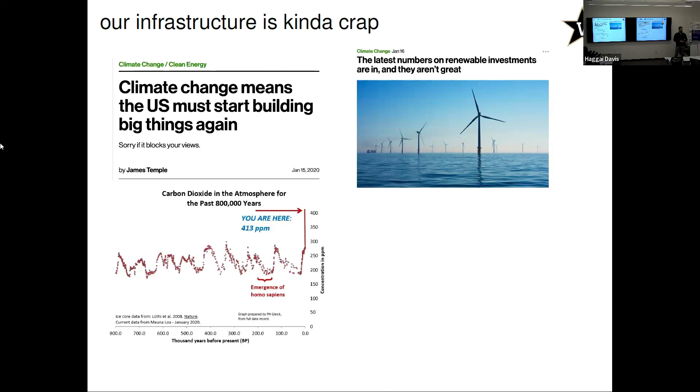These are all examples of what's going on over the past few years in our infrastructure. We know we haven't done enough to curb carbon emissions, so we need to start building bigger and more resilient things again. We also know that investments in renewables, although they've been increasing, haven't increased to the extent that we can actually meet the carbon offsets and carbon reduction that we anticipate and require. We also know that carbon dioxide in the atmosphere has reached substantial peaks, so a lot of crazy figures and worrying trends.

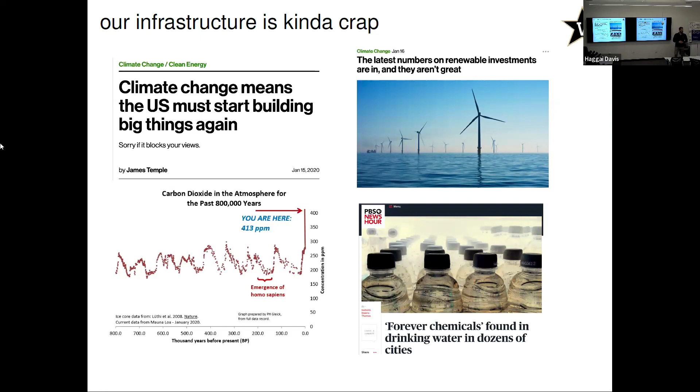There are also problems in water systems with forever chemicals and PFAS contamination, another issue that extends beyond the carbon footprint of other infrastructure. And we also know that Americans spend so much time on the road, so everywhere you go you're faced with substantial challenges, which gives academics like myself and other folks a lot of work to do.

In general, there are four major ways to address all of these issues in today's infrastructure, and these solutions can be categorized into four different approaches. The first one is policy-driven: governments, system operators, and stakeholders decide to enforce a new policy to curb emissions through taxation or tolls and so on. That's the first plan of attack to address these issues.

The second one is investment—building more stuff: building more solar and wind farms, building more batteries, building better reservoirs, and so on, adding more lanes sometimes, which can be controversial for the transportation folks. So this is the second solution.

The third solution is through incentives, using game theory, economics, mechanism design, and incentive design to change people's behavior. The fourth one is through theory—designing better control algorithms to manage today's infrastructure. So assuming we don't want to do any of the first three, how can we come up with new theory to improve today's infrastructure? My group's focus is mainly on number four. This doesn't mean the first three are not important—these strategies are all complementary and required to advance our infrastructure in cities, but my group focuses mostly on number four.

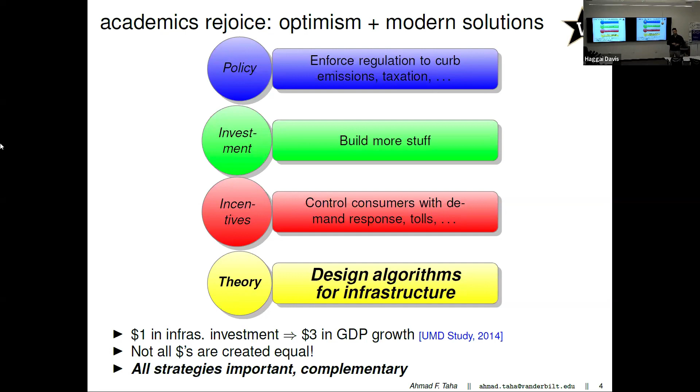So I'll reiterate, my group's research focuses on creating computational algorithms for urban infrastructure, and this is what the talk will be about. My group tries to develop the balancing of the development of new foundations with applications.

So I'm interested in two things. I'm interested in new theory and understanding why things work and how they work, but also I'm interested in applying it to realistic models and infrastructure in energy, power, water, and transportation.

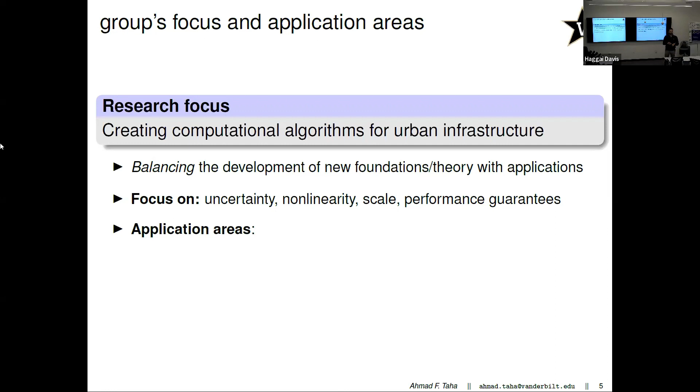The themes that we'll be focusing on today are uncertainty, either human-driven uncertainty or system-driven uncertainty, nonlinearity and the physics and the governing laws of physics in water, energy, and transportation, scale, and performance guarantees. I'm interested in an algorithm that works under certain non-restrictive assumptions or conditions, and I'm interested in understanding why it works more than whether it works or not.

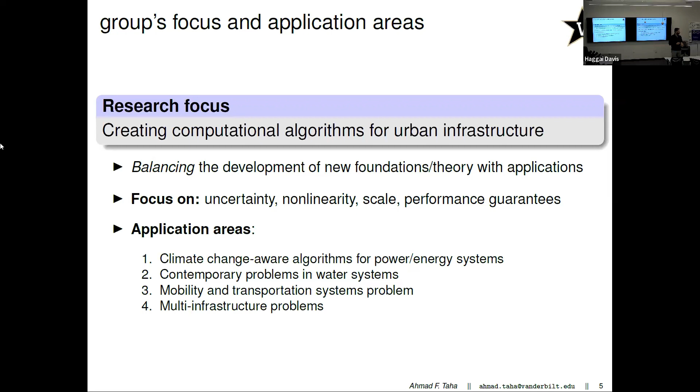And we will be covering these four themes. We will be talking about climate change-aware algorithms for energy systems. We will talk about contemporary problems in drinking water systems. We will also talk about mobility and transportation, as well as multi-infrastructure problems. So I won't have time to talk about number 4 as much, but there will be a little bit of the first 3 bullet points, basically.

The major technical challenges that I will be addressing in this talk, and that most of my PhD students work on, are basically one of these 4 challenges or all of them combined. First one is the lack of mathematical frameworks.

Sometimes in many infrastructure models, there's a lack of system-theoretic understanding of what's happening as a whole in the system itself. There's also significant time scale discrepancy, meaning that there's multiple time scales involved in the decision-making problem in a specific infrastructure.

Most of the dynamical models, most of the physics-based models that govern the laws of physics in transportation, power, energy, and water, are non-convex and nonlinear. So optimizing the performance can be very tricky and challenging. And the 4th theme is the rampant uncertainty. There's uncertainty from human-centered conditions, from weather conditions, from parametric uncertainty, and so on and so forth.

So these will be the 4 things that we will discuss today. And before we go through the discussion of what I'll basically be talking about, there's a core area of science involved, which is control theory.

So even if you haven't heard of dynamic system theory or control theory, or you come from a very different background, hopefully this slide should give you a super brief crash course on control theory in maybe a minute or two, all right? And during the talk, if you have any questions, just please feel free to raise your hand and ask me. It's meant to be an informal talk, so please don't hesitate to ask questions.

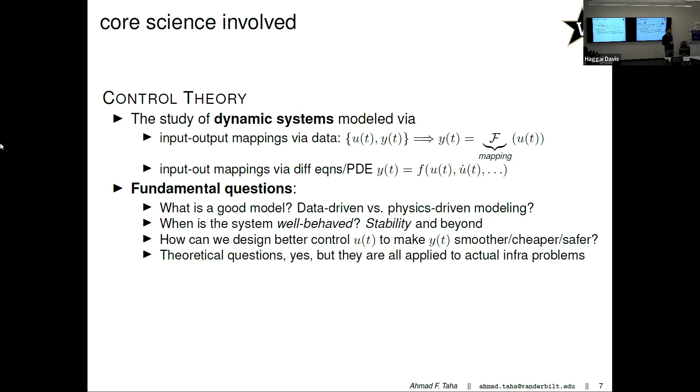Many of these questions are theoretical indeed, but they are all applied to critical infrastructure problems that we will discuss, with examples in climate change, flood control, traffic reduction, and so on. So basically, the entire talk will be about finding these models and how we use them to find a better U of t to make Y of t, my data, my sensor output, my measurements, behave in a better way, whether it's in transportation, water, or power systems. So more of a tutorial than a list of contributions.

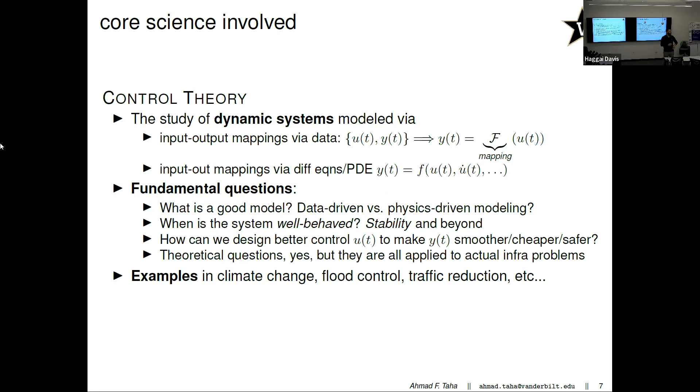The talk will come to you in 4 parts. The first part is some control algorithms in transportation systems. The second part, which will be the longest, will be on drinking water systems, basically how do I control hydraulics and water quality in drinking water systems. The third part will be about stormwater systems and how we regulate floods or control floods in real time when they happen in urban environments. And the fourth part is a new set of theory, a new set of math for renewables-heavy power systems, where most of the power coming from energy systems is generated from resources such as solar and wind.

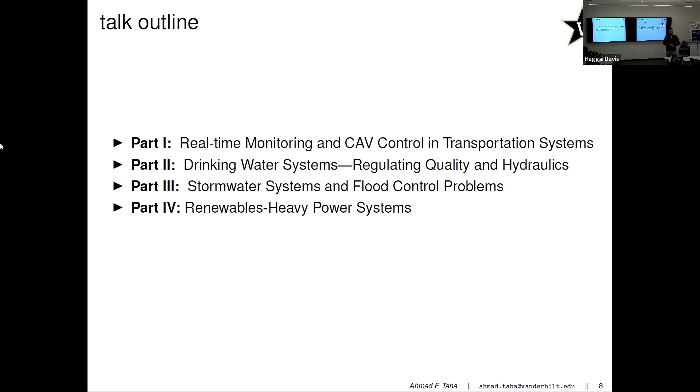So as promised, the first part will be related to transportation. We know that America loves cars. Anywhere you go in the world, you see fewer cars than here. And I'm sure most of us are aware of the history and the politics of why Americans love cars, right?

Motivation here is basically that technology can indeed reduce crashes, congestion, and emissions. And maybe we are not in need of Musk et al. to rescue us with their full self-driving technology. Maybe there's already technology that's really good enough for us to use to transition towards electrified transportation and fatality-minimal transportation systems.

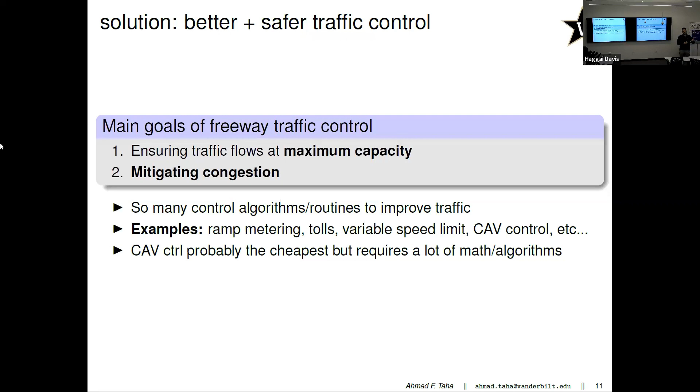Arguably, CAV control is probably the cheapest technology, but the downside is that it requires a lot of math and engineering, and it also requires the willingness of the system operator to take a risk of actually implementing an algorithm that an academic wrote in a transactions paper. But arguably it's cheaper because if you have a couple connected autonomous vehicles on the road, they can give you a lot of benefit to reduce congestion. This is what this portion of the talk will be about.

Before we talk about CAV control, let's talk about VSL control, which is variable speed limit. Basically, putting signs on the highway that tell people to abide by a certain speed limit, which is lower than the usual speed limit.

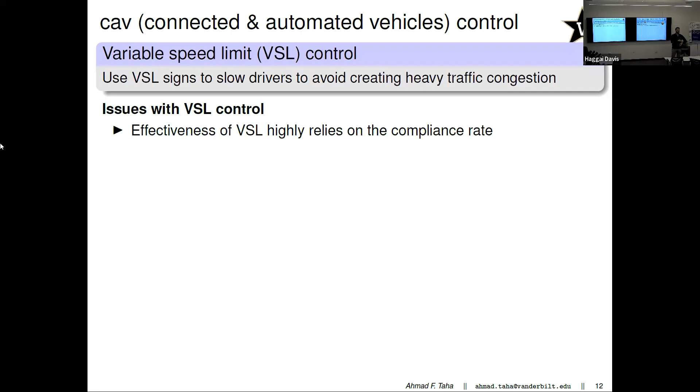There's issues with VSL control, which are basically that it relies on compliance rates. The nice math and theory you derive from VSL control mostly works when everyone's complying, or when most people are complying with the posted speed limit, but no one actually complies, or more than 80% of people do not comply. But there's actually a lot of recent work on coming up with theoretical guarantees when half of the population doesn't actually abide by the posted speed limit. So it's a very active and interesting research field.

Something I want to notice about VSL, because we have implemented VSL in Tennessee on a couple of highways: even when we post a variable speed limit sign that people do not abide by, in the period of time when that variable speed limit controller was posted, there has been a significant reduction in accidents on that same highway stretch over a significant period of time.

From a control engineering perspective, we want people to comply, but from a society-based perspective, this control algorithm, even though the way the number was generated is so complex, resulted in great societal improvement. People are not complying, but the outcome was still that there's been so much reduction in fatalities. Maybe it's because those who drive recklessly slowed down a little bit. There's a lot of societal components we do not understand in why VSL actually works.

But this talk is not about VSL, this talk is about CAV control. The scope of this work is to design real-time controllers for CAVs considering capacity drop, which is this phenomenon that happens when there's congestion on the highway. We want to take one of the most advanced traffic nonlinear models and do CAV control in a very efficient way.

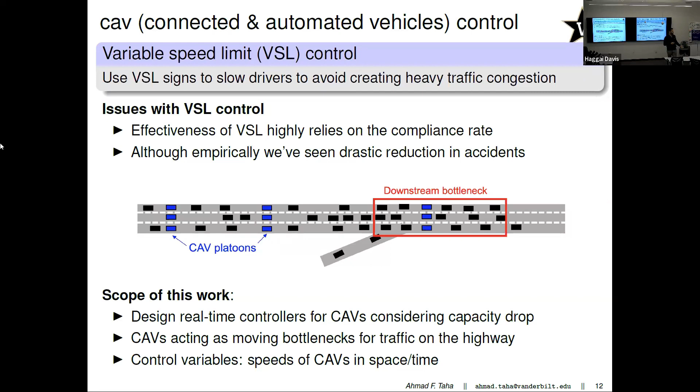There's a lot of literature on this topic that I'm not going to go through because I really want to get towards other topics in this presentation and give something for everyone. But basically, there's been a lot of control algorithms to solve this problem in the literature, and some of them are based on PI, which is a proportional integral control algorithm that seeks to minimize the error, defined in terms of a linear and an integration component of the tracking error of the system.

MPC is a model predictive control algorithm that optimizes using a coarse system model representation. There's been a lot of work on this, but the issue is that much of it is not computationally efficient, requires a lot of tuning, or requires real-time optimization. This adaptive linear quadratic regulator, another control algorithm we've specifically tailored, derived, and designed theoretically, addresses these issues in the literature.

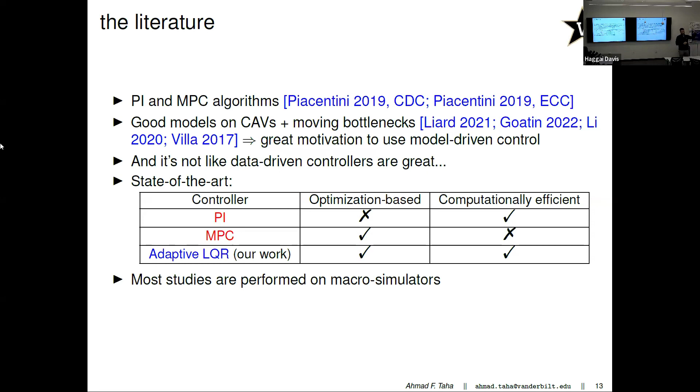Also, most studies have been performed on macro simulations, which are not very detailed models of what's happening on the highway. Ideally, we want to implement these control algorithms on very detailed micro simulations and get data from the highway. So the objectives are to design an efficient controller with performance guarantees.

We're not just interested in designing a controller that works. We're interested in designing a controller for the CAVs that works under certain conditions, and we want to know why it works, when it works, and when it fails to work. We call this performance guarantees. The other objective is to test the controller on both micro and macro simulation.

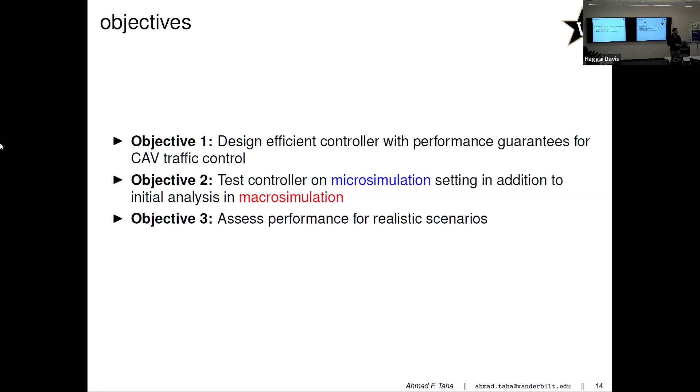This is basically the problem statement: the CAV traffic control problem. Even if you've never worked in transportation, this should give you a brief introduction to the connected and autonomous vehicle control problem. It's basically adjusting the speed of a car that someone's driving to mitigate traffic downstream, subject to advanced models of traffic and data and measurements from the system operator. That's the CAV control problem: adjusting the speed of the connected autonomous vehicle that's been put on the highway by the city or transportation system operator.

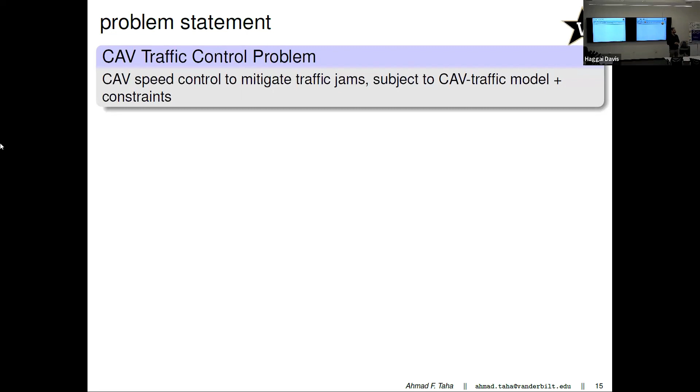Mathematically, this problem can be written as follows. We want to minimize a certain cost function in terms of the state of the system and the control input, the state being x, the control input being u, subject to the nonlinear dynamics. These nonlinear dynamics delineate two things: the physics of the car, basically the position and velocity of the CAV you're trying to control, and also a detailed model of the traffic densities on the highway.

Another control input is u of k in calligraphic u, meaning my control input for the car is bounded. I can't set an arbitrary speed; the speed increments of my CAV need to be slowly adjusted, and so on. The system states here are basically the densities on the highways and the CAV states. The cost function minimizes some operator-driven cost to penalize congestion and to make sure that changes in the speed of the CAV are smooth and not erratic.

So this is basically the control problem: a cost function subject to physics and subject to other human-driven or car-driven constraints for the CAV.

The approach we follow to solve this problem is through an adaptive linear quadratic regulation, where you don't need optimization. We solve problem P by actually not solving P directly, which is the novelty here. You could take this to any optimization solver, but the problem would be non-convex and super slow to solve. You want to solve this in real time, but you can't because the problem has so many states and tricky nonlinearities for traffic models, so you need to find proxies to solve problem P.

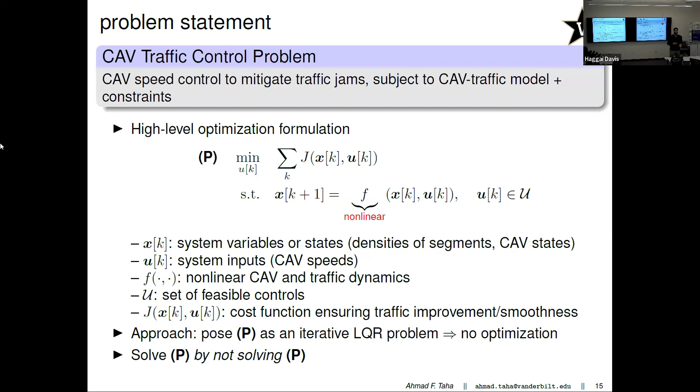In more detail, this is what the dynamics of the traffic densities and CAVs look like. The state vector collects all the traffic densities rho on different highway segments, as well as the positions P1 through P of the CAV positions at time K. The control inputs are the speeds of the CAV platoons—each platoon should ideally have a speed, and this is what we're solving for, to produce for the person sitting in the car.

The objective is to design a simple feedback control K that looks like this. In dynamic system theory, this is one of the simpler control laws, and it tells you basically two things: one, measure x of k in real time—measure the state of the highway in real time.

And the state of the highway is nothing but the state of the traffic densities on the highway, which if you have a lot of sensors, you can reconstruct or compute, in addition to the state of the CAV. But you're sitting in the CAV, so your state is kind of with you.

The second thing that this control law tells you is to compute a gain k as a function of little k to make sure that this problem I've explained earlier is actually solved. And this is what we do here. We find a way, given the nonlinearities of the system and the highly nonlinear system dynamics, to find k that changes iteratively in a very computationally efficient way with some performance guarantees and some metrics that we optimize for.

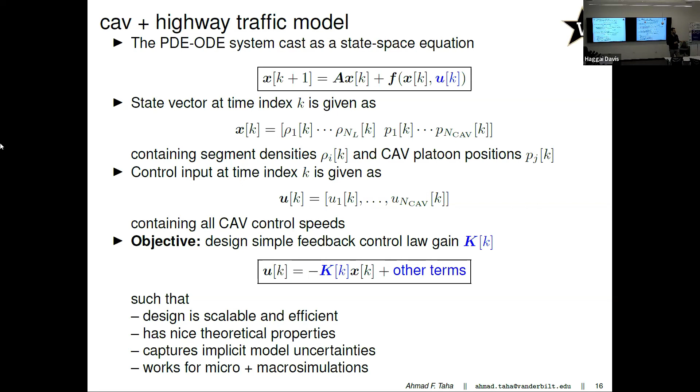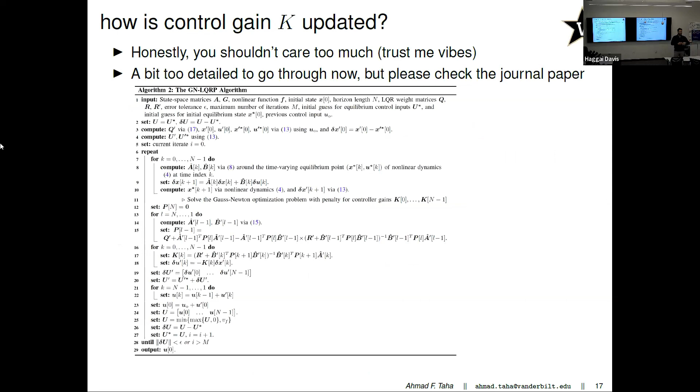I'm not going to go through the detail of the algorithm, it's going to take like 20 minutes and there's no point. So if you're interested in the algorithm, you can find it in the paper. But basically, the algorithm is just a detailed linear quadratic regulation, which is a very famous control approach, changed and modified to meet some performance guarantees for the nonlinear systems.

We have done two sets of simulations, macro simulations and micro simulations, and we have compared with the approaches in the literature, and we have utilized metrics in the literature that tell us how good the controller is behaving. I'll spend a few minutes just explaining what's going on here.

So for the macro simulations, the very coarse macro simulation that isn't concerned with individual vehicle dynamics, just depicting the traffic densities on the highway, we set up an 8-kilometer long highway stretch, with a duration of 2 hours and 10-second time steps, which could be reduced if needed.

An accident is simulated resulting in a jam, and what you see from the figure is exactly the jam happening sort of halfway through the end of the highway stretch.

So this is basically the heat map, or the traffic density map, that you see in many transportation systems papers, which tells you what's going on in terms of the segment number and in time, and what the traffic density is on the highway. Obviously, the more yellow the traffic density, the worse it is, which means there's congestion.

And this figure depicts what's happening without any control. Like on a remote highway somewhere where there's no control algorithm, this is usually what happens, and it takes so much time to actually get rid of this traffic jam.

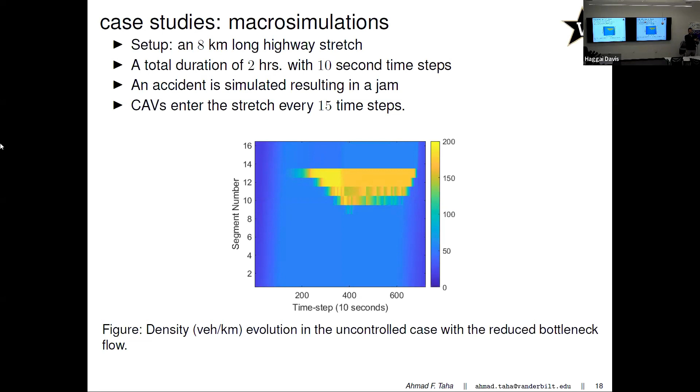Ideally, what do we want? Ideally, we want this yellow color to be dissipated throughout the figure, or to even be minimized through a smart algorithm. And this is what we want to ideally see.

So these are the answers that we try to answer, there's a typo there. We try to come up with answers to the following questions. Are the proposed controllers—and I have to say that we proposed a couple of controllers, not just one of them—effective against traffic bottlenecks?

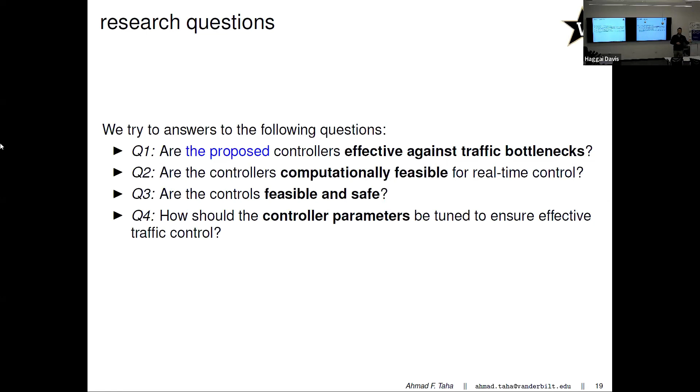Are the controllers computationally feasible, or does it take 5 hours to solve this one gain k while the simulation is running? Are the controllers feasible and safe, like can an actual driver utilize these components even if there's no adaptive cruise control or any technology in the car? How should the controller parameters be tuned? Do they require a lot of tuning, or are they tuning free? Can I implement a similar gain on a different highway setup, and will it still work?

We've also utilized some evaluation metrics, and the evaluation metrics are as follows: total travel time—after we implement the controller, is the total travel time reduced, or the same, or increased? Is the total travel distance becoming better? Is the mean speed lower or better, and so on and so forth.

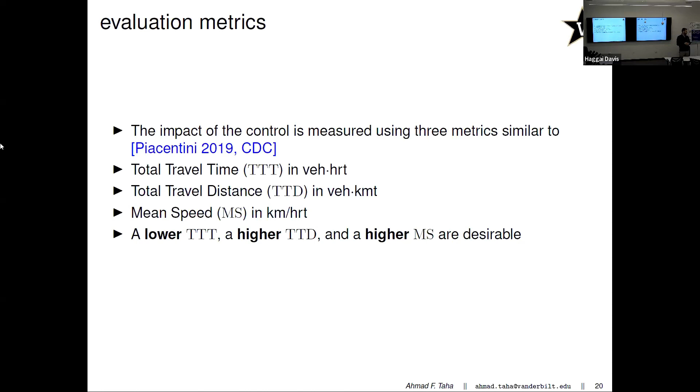Ideally, we want smaller travel time, right? You want to get home earlier. And we want a higher TTD, total travel distance, meaning the control algorithm is able to take people further away if needed, and a higher mean speed. So these are the three metrics that we have optimized for or tested for.

And this is what happens when we implement the controllers that we've proposed. We see that there's significant dissipation of the congestion and bottleneck here.

Yes, just a small question. Why do you have these three metrics instead of, say, just throughput?

We can. We wanted to be consistent with the papers that we were comparing with, so we used the same metrics that they did.

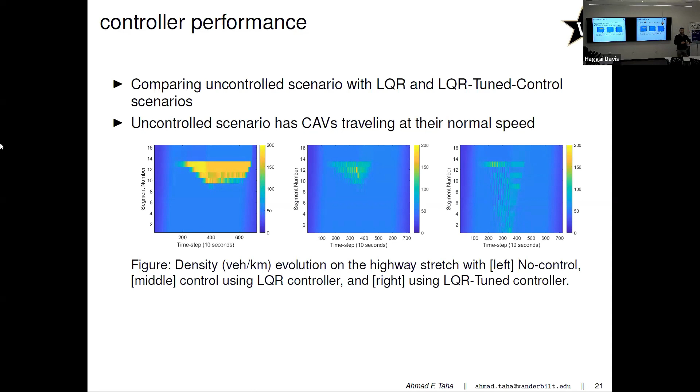So this is what it shows. It shows that the jam basically got significantly dissipated in space over a shorter period of time, which resulted in an improvement in the mean speed and a reduction in the total travel time, and an increase in the total travel distance.

Furthermore, we have actually also implemented this on micro simulations, and we've seen over a variety of simulations and test data that we were able to improve mean speed by 22%, a significant increase.

We've also compared it with the literature, with two approaches in the literature, and we've noticed that the proposed approach we're developing is truly plug and play, in the sense that you need very few computations. You basically just need some simple matrix vector multiplication to compute the gain k, which means you can actually implement it in real time, even if there are some delays in communication with the system operator.

The controllers also require very little tuning. There aren't that many parameters that you need to tune, whereas in proportional integral based control, you have so many little parameters that you have to tweak and play with to obtain your solution.

The journal paper explains everything in great detail.

Yeah, I'm sorry to interrupt again. Is this a centralized controller, or is it operating per... Centralized, yes.

Centralized. Another open research question is to actually figure out a way to make that gain k, that I showed you in blue, block diagonal, meaning it's decentralized, meaning it requires little communication, which could also be very important if you want to minimize the communication delay and so on.

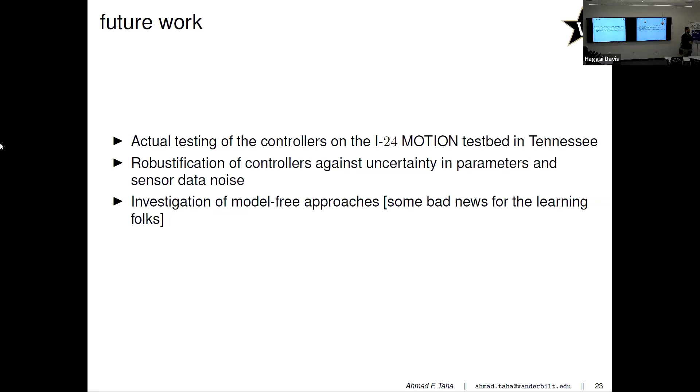Also, I'd like to spend a couple of minutes talking about the gigantic testbed that we have in Tennessee. Full disclaimer, I'm not part of it in the sense that I'm not one of the PIs, but it's something that I utilize all the time, and I'm happy that we have that at Vanderbilt and in Nashville. It's led by Dr. Dan Work, who you might be aware of.

But basically, we have a giant testbed on I-24 right outside of Nashville, Tennessee, that is the world's most sensed highway. It truly is the world's most sensed highway, in the sense that the state of Tennessee invested so much in making that stretch of highway highly sensed and highly automated and so on and so forth.

And the transportation group at Vanderbilt has done tremendous work in actually taking this raw data that you get from the highway and giving you traffic densities and speeds and so on, so you can use it in your research. This testbed basically provides real-time traffic MRI and allows for real-time control.

And the folks who were working on variable speed limit control implemented the VSL control based on this data and have seen a significant reduction in the accidents happening on the highway. So an impressive success story for the group there.

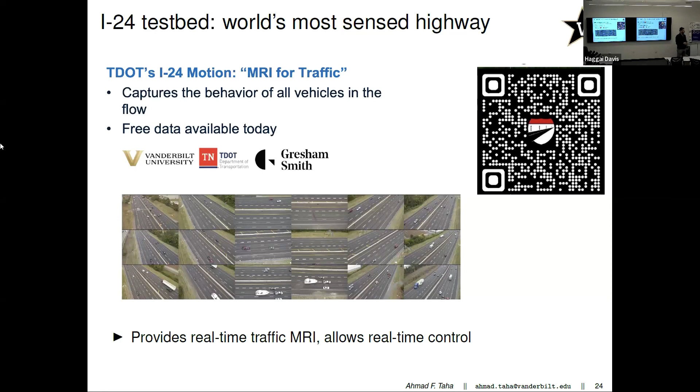And you see what these cameras look like. They look like the following: there's 40 poles, and every pole has 6 cameras which take a picture of the cars, and there's a suite of learning algorithms and image recognition and software identification and recognition tools that basically, from the pictures of the cars, generate densities for you to use in your research or to get real-time data.

So this is the website. Please visit the website to learn more about this and to download the data sets. I could spend so much more time on this, but please do visit the site and learn more about the work.

It's tremendous work, and hopefully soon anyone who actually wants to implement an algorithm can take these Simulink files and MATLAB files and start testing their own algorithm on what it could actually do to the traffic densities on the highway.

So you'll be able to plug and play any control algorithm you have in mind and see its impact, so that a reviewer of your paper wouldn't say, oh, you've just implemented it on a simple macro simulation model in your publication.

We've also worked on other research problems in transportation. The first problem I've worked on a few years ago with some students is: where should you place these camera poles on highways? Usually in transportation systems, they're placed arbitrarily every 1 or 2 kilometers, but that sounds a little arbitrary. So if you have a highway with on-ramps and off-ramps, and a certain physics-based model, how can you optimize the placement of traffic sensors?

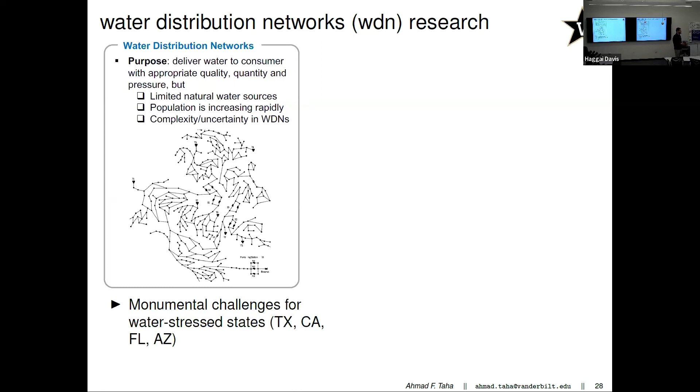So it's often one of the biggest issues in growing cities, like most of the major cities in Texas. Again, monumental challenges for water-stressed states such as Texas, California, Florida, and Arizona. So this is basically what WDN research is about.

To be more concrete, there are two significant areas in drinking water distribution systems that you see hundreds of publications on every single year, and they are quantity and quality.

Quantity is basically the process that defines pressure and flow, whether it's steady state or transient flow. We want to get adequate pressure and flow to consumers across the city. The major control engineering problem there is how to adjust the pump and valves in real time, or every hour, to maintain adequate levels of flow and pressure throughout the entire network.

The quality problem, which operates at a faster time scale than the steady-state hydraulic problem, is basically ensuring water is safe for consumption through water quality proxies. Typically chlorine concentration is a good proxy of whether you should be drinking the water, heavily filtering it, throwing it away, or boiling it. The control problem for quality is adjusting how much decontaminants, like chlorine, you want to inject in the network to decontaminate it from microbial or other sources of contamination.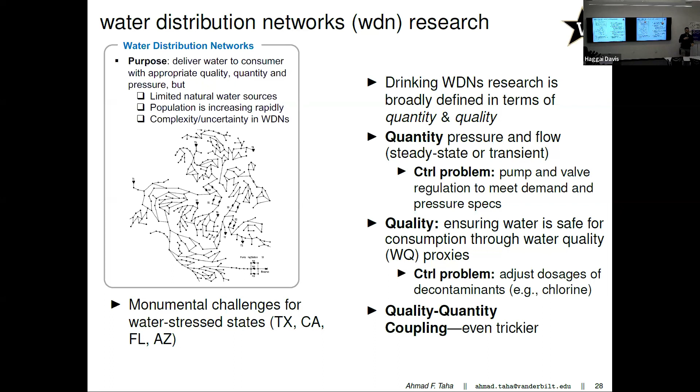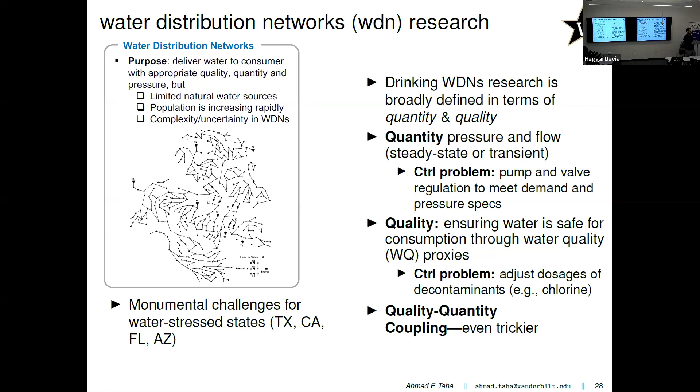Furthermore, there's also the interaction between quantity and quality, because quality is impacted by the pump speeds and how you adjust and regulate pumps and valves due to how water flows. There's a nice integration of the two, which makes the problem even trickier.

Some of the technical challenges specific to water systems: flow direction in systems could change arbitrarily, and the models are non-differentiable, nonlinear, and non-convex. The topology could be tree topology or looped, so establishing theory that works under different assumptions is difficult. And there's so much uncertainty in terms of the pipe roughness coefficient, the demand, sensor noise, and so on.

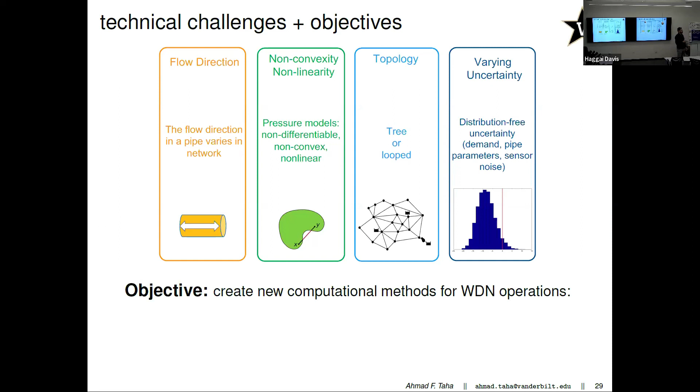So what I try to do with my group is create computational methods for water distribution network operations that focus on quantity, quality, and their integration across time scales. Ideally, I want these methods to be scalable, robust to uncertainty, and derivative-free, without making the assumptions people have made in the recent past about differentiability or linearization of these models.

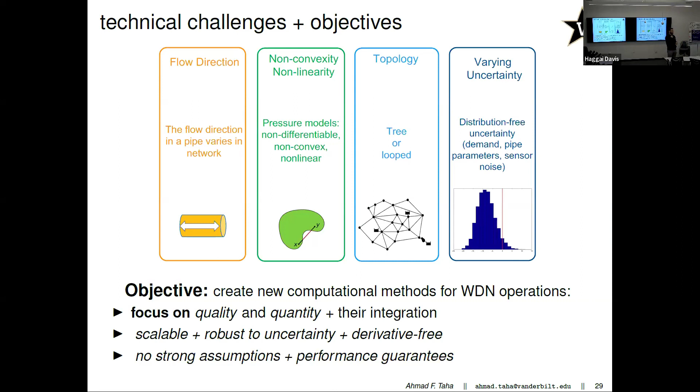This is what some of us may have learned in a hydraulic class or water resources engineering class. These equations model mass and energy balance in drinking water systems, in junctions, tanks, pipes, pumps, and valves. Basically everything you see here in blue is linear. Mass balance in hydraulic systems is linear because of the basic inflow minus outflow equals demand equation, and because tank dynamics are naturally linear.

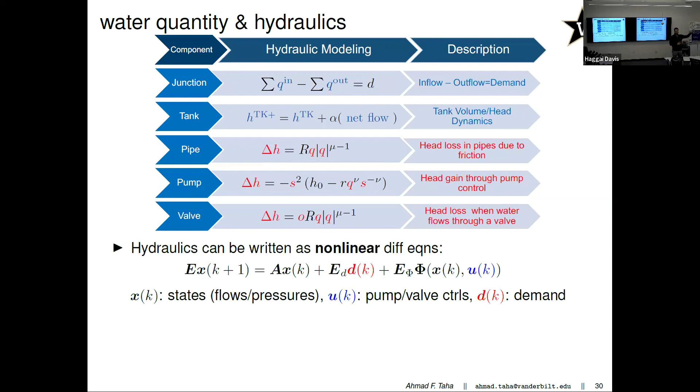However, energy balance equations that dictate head loss and head gain in the network are actually nonlinear. This is what you typically learn in the civil engineering class on water resources hydraulic models: the head loss or pressure loss model is nonlinear, while the mass balance model, inflow minus outflow equals demand, is linear. This formed the basis of our work on quantity in water systems.

This model can be written as a system of nonlinear difference equations that include algebraic constraints. The control problem here is to adjust the control variables, the pump speed and valves, given a lot of uncertainty from the parameters in the system, the demand D of K, shown in red, and other sources of uncertainty in the system.

What's new in our work is that we provided new control algorithms that find a way to bound the nonlinearity so you are able to obtain convergence guarantees on when the water flow problem for the hydraulic systems actually converges to a specific solution. We prove these results in a few journal publications.

We've also shown that the control algorithms we've developed significantly reduce pumping cost, which gives the water utility a lot of incentive to implement some of these algorithms, since pumping cost is usually very high for the water utility.

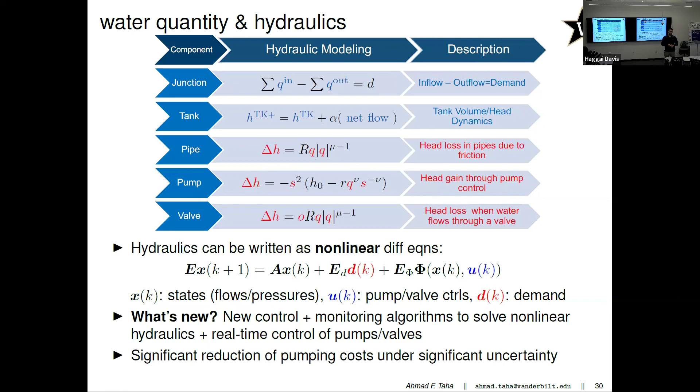In fact, in many cities, the water utility tends to be the number one customer of the electric power utility, due to the expensive pumping cost of the system.

Moving on to water quality, the water quality models are unfortunately even more cumbersome, so we won't cover them here. But quality basically depicts how the concentrations of decontaminants, such as chlorine, evolve in the network. Ideally, you want the concentration of chlorine to be between two values in the system.

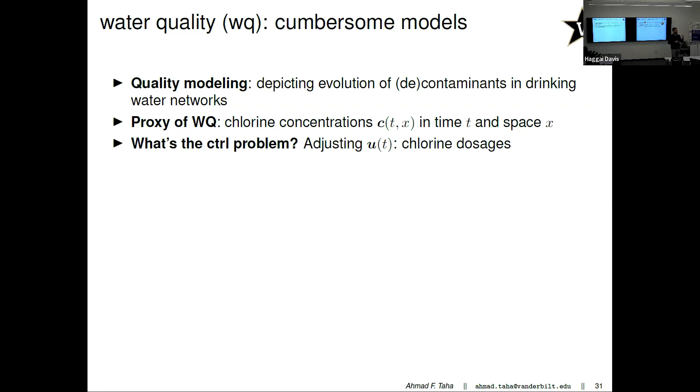A proxy of water quality is the chlorine concentration C of T comma X, where C is the concentration itself in milligrams per liter, and it varies in time and in space throughout the network. The control problem is adjusting U of T, the chlorine dosages.

We have an extremely thorough study by one of my PhD students, Salma, who came up with a thorough explanation of how to model the concentration of chlorine in an entire network and built many different models to capture that. Basically, the ODEs and PDEs we use depict conservation of mass, transport, and decay of chlorine in the network.

We know that there's no analytical solution for that PDE. The PDE is nonlinear, so there's no analytical solution for it. And it was very much unclear which method is best to solve the PDEs.

This is what we proposed here. We proposed a host of algorithms or mathematical models to tell you which method you should be using in different contexts. Also, it was unclear in the literature how to adjust the dosages of chlorine through different vantage points of the network. We've come up with control algorithms to tell you how to adjust the concentration of injected chlorine, so if there's a microbial contamination, it can slowly subside and water remains healthy to drink.

We have implemented many of these algorithms on many networks with hundreds to thousands of junctions or nodes and pipes, and we've seen significant impact in terms of contamination risk reduction and cost efficiency.

The basic impact of this work is virtually an MRI that tells you what the water quality is like in an entire city in an urban environment, telling people when it's safe to drink the water, and when it isn't.

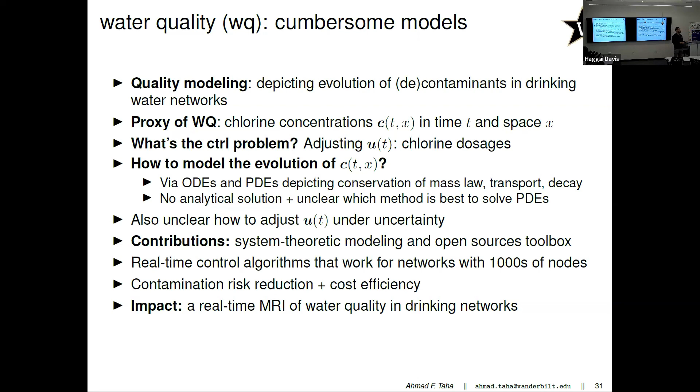Third part - I realize I only have 8 minutes, so I'll try to rush through this.

The third contribution here is related to stormwater systems. Stormwater systems are basically infrastructure that has either been naturally built or procured to control and mitigate floods, but stormwater systems do much more than just mitigating floods - they also prevent stream erosion while maintaining a very important hydrologic cycle.

This work is basically on stormwater systems. We know that urbanization reduces soil infiltration, which increases runoff generation - the water has no place to go due to urbanization. And climate change exacerbates this problem with more intense storms and flooding events.

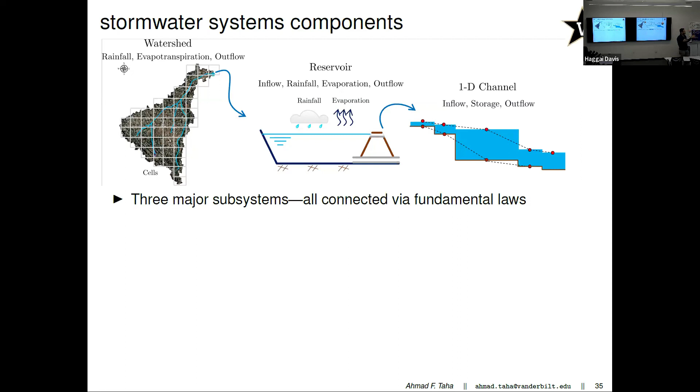In this work, we come up with a system-of-systems modeling approach to model the overall inputs and outputs of the system. We also use ODEs and PDEs that are highly nonlinear to depict the physics of the stormwater system, coming up with this nonlinear difference equation model with algebraic constraints, where again, the problem is to control U.

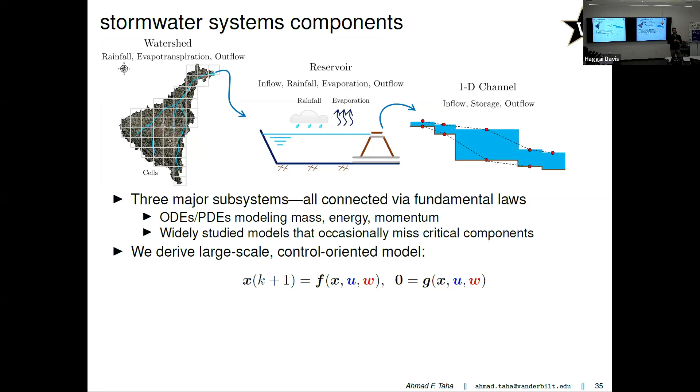In this example, U is basically the gates in your reservoir, or how you're controlling the detention ponds, or maybe where you're putting some green stormwater infrastructure, under uncertainty W. X of K are the outflows and the depth in the watershed, as well as the reservoir. There's a lot of exciting dynamic systems and control engineering problems in this area, mainly because a lot of people who work in this discipline are hardcore hydrologists, so system theoretic understanding related to controllability, observability, or stability are very foreign to them, which gave us a lot of food for thought.

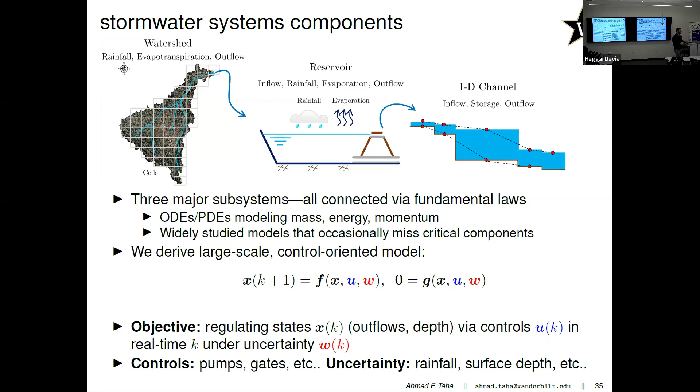This problem is filled with uncertainty from water infiltration, rainfall, and surface depth. So there's a lot of nice robust control problems, or control problems for systems under uncertainty. What we produce in this work are a set of algorithms meant to work for nonlinear dynamical systems under different conditions and under uncertainty.

We've actually gotten realistic data from the city of San Antonio, from SARA (San Antonio's River Authority), as well as from the city of Sao Paulo in Brazil, to see what would happen if we implement these control algorithms on really accurate models of these stormwater systems. We've seen a significant reduction in the probability of flood occurrence with substantial cost reduction for the city, and you'll find some papers that discuss this.

We dabbled from the hydrological side on questions on control. Stability seems to be a problem of these control algorithms. Can you comment on that? Did you face any challenges in stability?

We did not, actually. What I meant by stability is it's an interesting thing to consider in the future. Our approach was mainly control: give me this nonlinear model, tell me what the constraints are, what the cost functions are, and tell me how to solve the control problem as quickly as possible, while being loyal to the physics of the system. So when you approach a control problem this way, you basically get a control signal U which adjusts the gates of your reservoir, and you don't theoretically study stability — we haven't studied it.

Have you seen what kind of fluctuations the gates undergo in your solutions? In the control problem, we ensure that the changes in the gates are very limited — you can't suddenly change the gate from very low to significantly larger. So we penalize these deviations, and in our solutions the changes are very incremental and not damaging to the infrastructure itself.

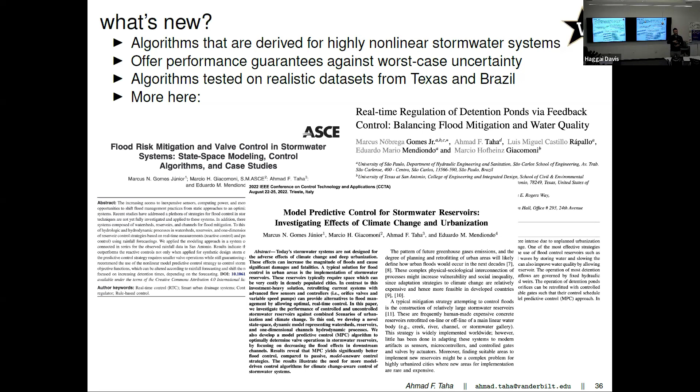Thanks very much. Okay, so the last part, I'll take three minutes and it'll be done — this is about robustifying renewables-heavy power systems. The issue is renewables: we all love them, but they come with their issues, and more renewables means more trouble for future power systems if we don't change the way we control power system dynamics. Unfortunately, the increased penetration of renewables means there's an increased mismatch between prediction and reality, not just in megawatts, but also in percentage points.

Because we're adding so much more renewables, that means in 20 years when a system operator in New England, New York, or California is trying to predict what solar and wind will be over the next hour, and they miss by 2%, that 2% will be much more significant than the 2% they're missing today. Which means there might be more people who have no electricity for the next hour or so. It's a very serious problem.

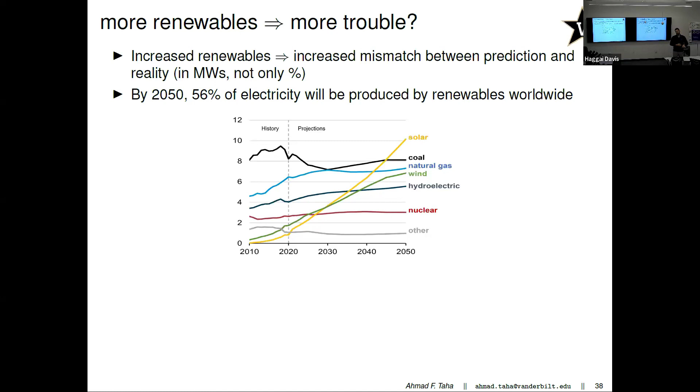We know that by 2050, 56% of electricity will be produced by renewables worldwide, which inches us closer to fuel-free power systems, which is ideally what we want to get at as soon as possible.

This is a figure that shows the increased penetration of solar over time. The scope of this work is basically a new set of control algorithms designed mainly for renewables-heavy power systems. What happens if I paid so much money to own or purchase a new village and I want to build a power system mainly comprised of renewable energy sources—solar, wind, batteries, and maybe one small thermal plant? What is the math that I need to manage this system?

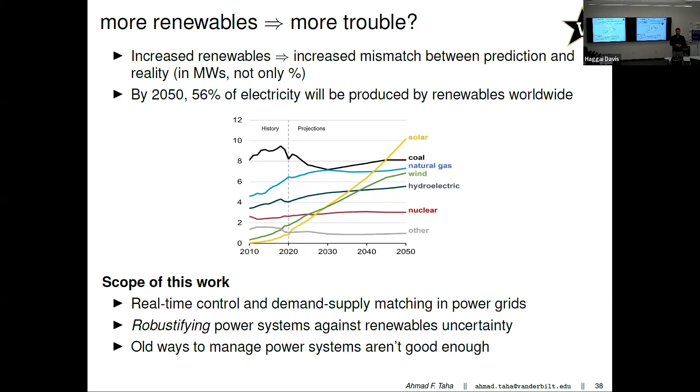The whole idea here is to robustify the power system against worst case uncertainty in renewables. Unfortunately, the old algorithms that power system operators implement in their command and control center are designed for older, fossil fuel models that no longer work.

The cornerstone of a lot of grid studies, and the reason why you get instantaneous power when you flip on the switch, is a very ancient control algorithm called automatic generation control. This basic control algorithm is designed for linear systems, not for heavily nonlinear systems.

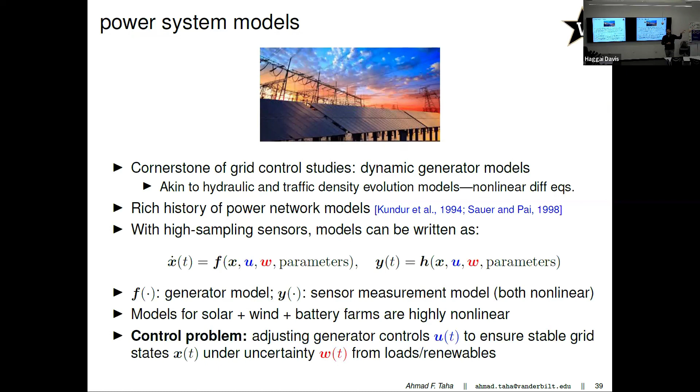The issue in power systems is that most of these newer models of solar and wind are extremely nonlinear compared to thermal power plants, which are also nonlinear but not quite as nonlinear as models of solar and wind that involve a lot of power electronics, inverters, and so on.

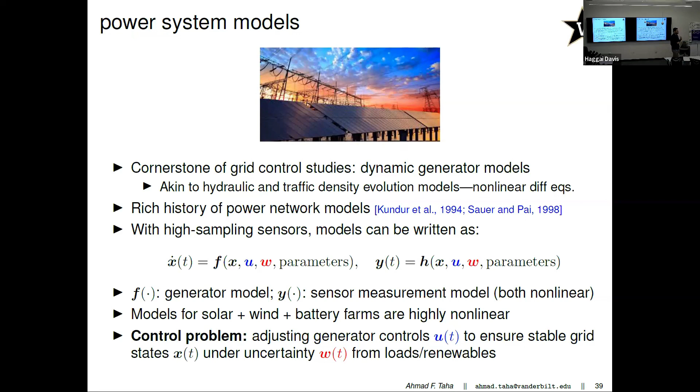The control problem here is basically how to adjust the control input U—how much you're curtailing your solar and wind, or how you're controlling voltages in these power systems—such that the voltage is regulated, such that the frequency of the grid is regulated, and so on.

There's literally hundreds of studies every month. This is a very rich field of research, so many studies on this topic. Most of them rely on linearization of the system dynamics and come up with linear system theory-based methods.

In this work, we actually get to the nonlinear dynamical system that has a lot of solar and a lot of wind, and try to find ways to parameterize the nonlinearity and bound the nonlinearity, then come up with a control algorithm. This is what's missing in the literature—a new theory to parameterize nonlinearity and robustify against it.

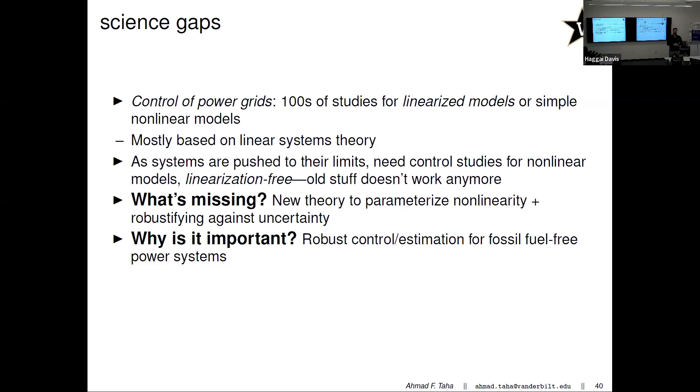To summarize the talk: it would be development of new computational methods to make today's and tomorrow's infrastructure more secure, resilient, and cost-effective using control theoretic techniques that aren't too theoretical. I have to emphasize that most of these papers have a part where we describe the algorithm, and the algorithm could be well understood without even referring to the theory. We've shown significant improvement in how the system behaves in different circumstances.

Future work will try to study new identification algorithms to better learn the dynamic behavior of the system, specifically in solar and wind, where a lot of these models might not be as accurate as we'd like them to be. So learning the dynamic behavior of the models with a lot of data could actually be useful eventually.

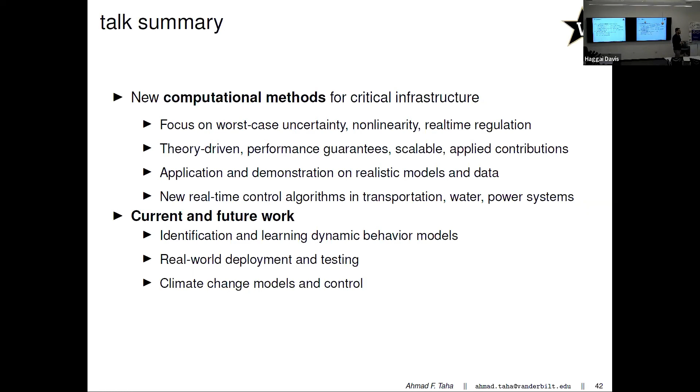We're also interested in real-world deployment in transportation systems and so on, and some of my students in the group are working on dynamic models of climate change and how to understand the varying temperatures in different parts of the planet, understanding controllability and stability properties of climate change models.